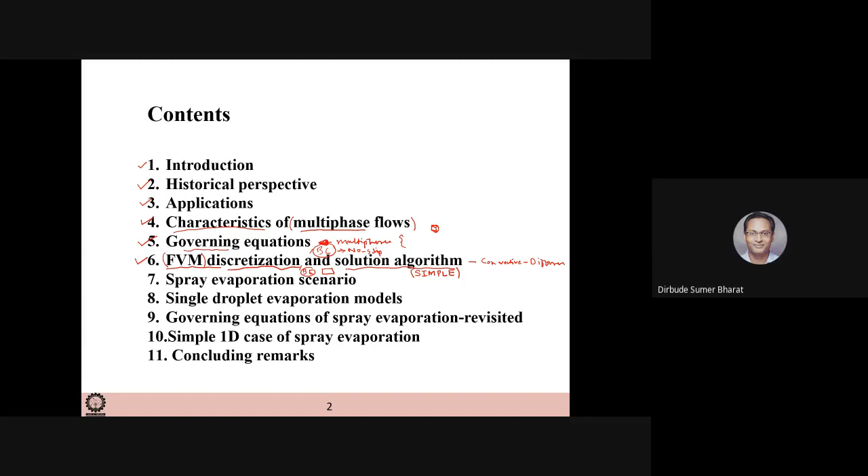It can be straightforwardly applied and the problem can be solved. Once I discuss this, I will discuss the phase change thing. I will talk about the spray evaporation scenario, how it occurs, and how spray evaporation modeling is done.

In the state of the art, the modeling is single droplet modeling. When you model single droplet evaporation, it is assumed that all other droplets follow the same behavior. These evaporation models are applied to every droplet so we can predict the evaporation rate, and once we get a mixture, it will burn the fuel and air, giving combustion in internal combustion engines or gas turbine devices.

There is an elegant theory and modeling strategy for single droplet evaporation which makes one model different from another. I will show you how different models are used for single droplet evaporation.

I will again show you the governing equations of the spray evaporation model, revisiting these governing equations and how they are modeled in terms of source terms incorporated for spray evaporation, and where the spray evaporation terms come in.

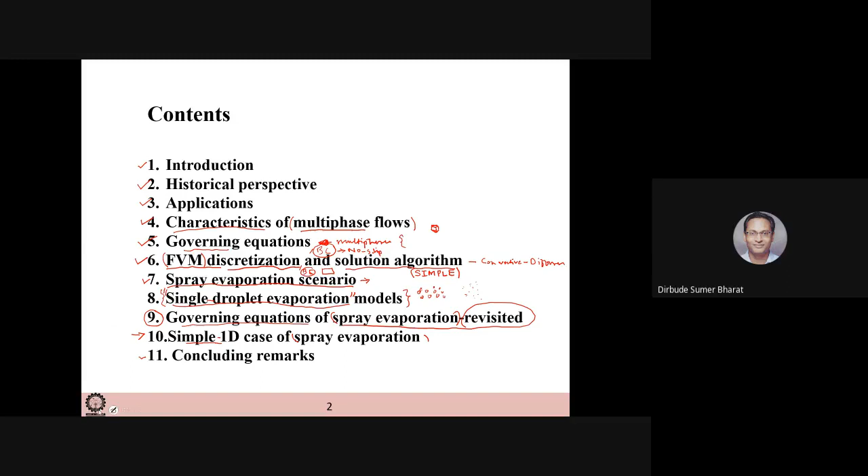First, what are multiphase flows? Multiphase flows generally have two or more distinguishable states or phases - solid, liquid, or gaseous. One can have a solid phase and another a liquid phase, or one liquid phase and another gas phase.

For example, air bubbles in water or suspended solid particles in air are examples where you can see two distinguishable states or phases - one solid, another distinguishable easily. Such scenarios can be called multiphase flows.

In other cases, there may be two distinguishable phases but with different chemical properties - distinguishable in terms of chemical properties. For example, oil in water: oil is chemically different from water, but both are liquids. Such scenarios also come under the purview of multiphase flow.

When there are two phases in the picture, like solid phase and gaseous phase, we say these are two-phase flows. If there are three phases involved, we call it three-phase flow, and similarly more than two or three is generally called multiphase flows.

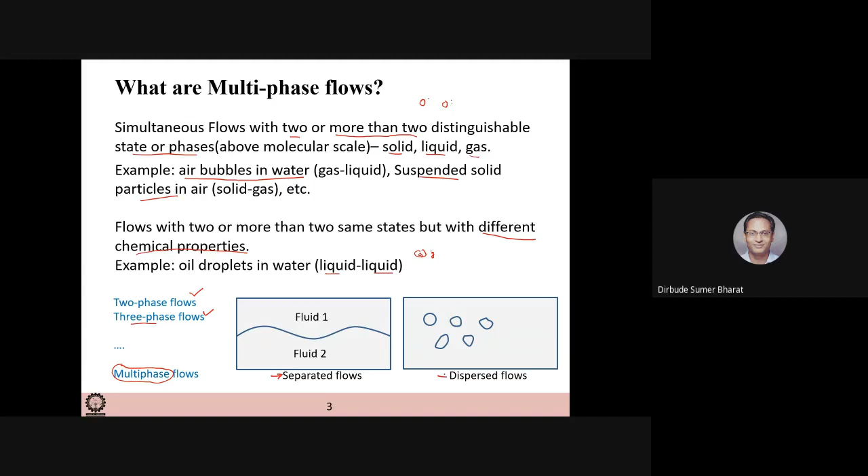These multiphase flows are mostly seen in two types of scenarios. One scenario is where the whole fluid one can be separated from the whole fluid two with a distinguishable interface.

There are two continuous phases - one continuous, another also continuous. This is called separated flow, where fluid 1 is completely separated from fluid 2 by a sharp interface. There is no mixing, no voids in fluid 2 or fluid 1. They are continuous but distinguished by the interface.

The second scenario is dispersed phase. In a dispersed phase, the second phase - this is fluid 1 and the other is fluid 2 - is dispersed, not continuous. It appears in parts here and there within the continuous domain, so you may have the second phase scattered within it. This continuous one is called the primary phase, and the second one is called the secondary phase.

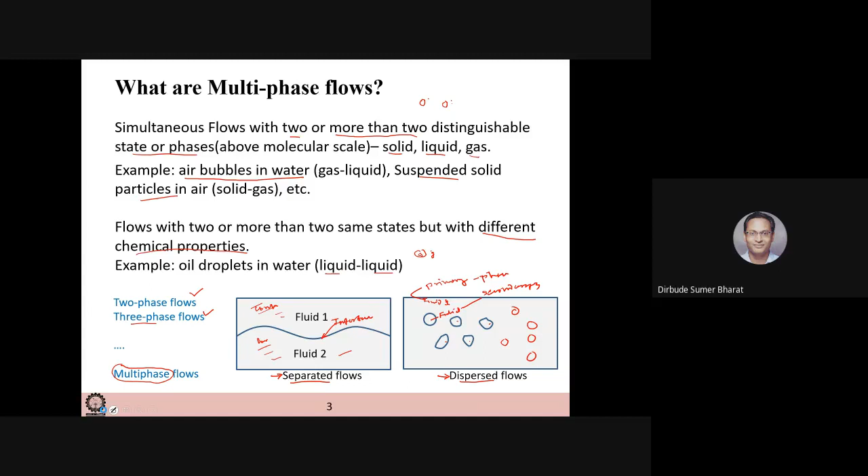So having seen two types of scenarios, I'll look at the historical perspective. In history, if you study fluid mechanics, most of the research has been done on single phase flow. The study of multi-phase flow begins with World War II.

Initially people started working with homogeneous mixture models, where the main problem is to find out the viscosity. In homogeneous mixtures, they essentially consider one equation for both phases, with certain properties included.

For example, you have this equation del phi del t plus, I'll write it in 1D, del phi del x, with certain properties like mu by rho, and del 2 phi del x2. In that case, these properties will be mixture properties.

So the problem then becomes to find out what is the viscosity. The main problem in such homogeneous mixture models is to find out the mixture viscosities or mixture properties.

For example, if you have a heat transfer equation, instead of viscosity you might have thermal conductivity. In that case, the main problem will be to find out the thermal conductivity of that model. Most other types of models were based on separated flow models.

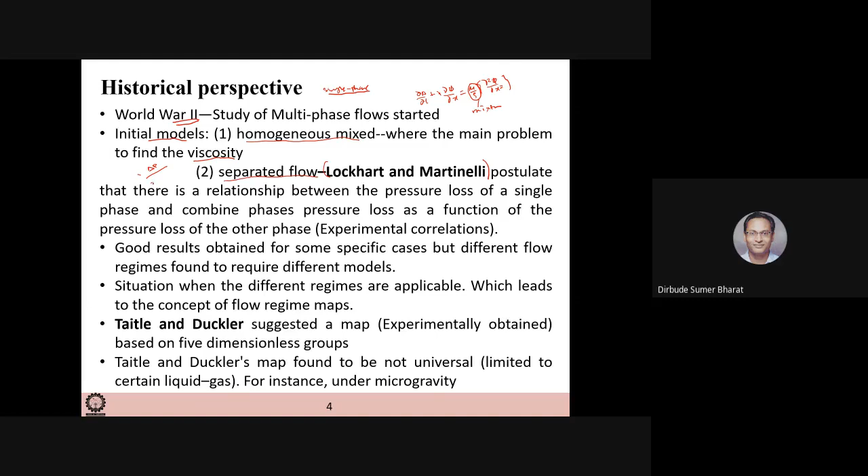In separated flow models, the initial beginning started with Lockhart Martinelli. They essentially postulated that, for example, if you know the pressure gradient in phase one, and the pressure gradient in the second phase, and somehow the relationship between the pressure gradient in phase 1 and phase 2 is known, then we can calculate the total pressure gradient.

But the problem is the total pressure loss is not a linear function - there is no linear relationship available between delta P1 and delta P2, and that is the problem. This non-linear relationship led them to derive a lot of experimental correlations.

They gave a lot of correlations for different specific cases. Based on case to case, they gave different correlations, and their correlations were found to be very good, but the requirement was that different models had to be used for different regimes, which led to the concept of flow regime maps.

So this particular practice, people started following, and they started making flow regime maps, because a certain flow regime will have a certain flow model correlation, while another flow regime will have another correlation model. People started making correlation maps like that. If you see the books on that, you will get to know there will be some patterns.

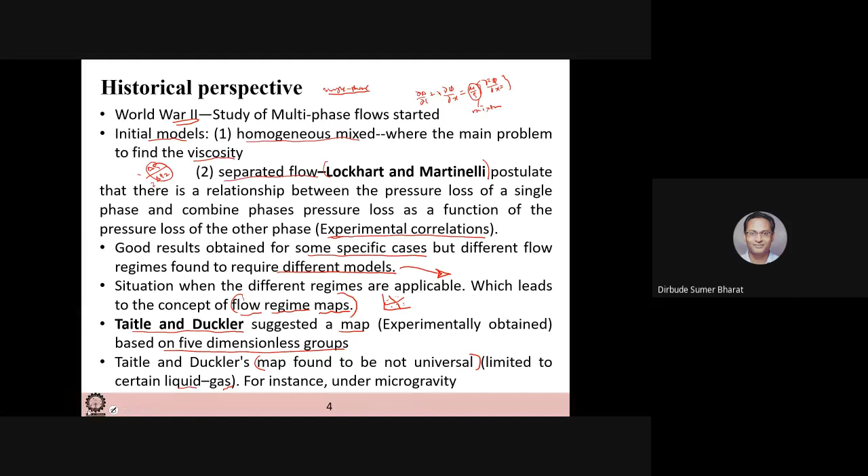So what is the way forward then? The most viable perspective for solving such problems is to go for numerical simulations. Various scenarios which we observe are, as I said, one is a separated flow kind of case, another is a dispersed phase flow case.

In this, I will not talk about separated flow models.

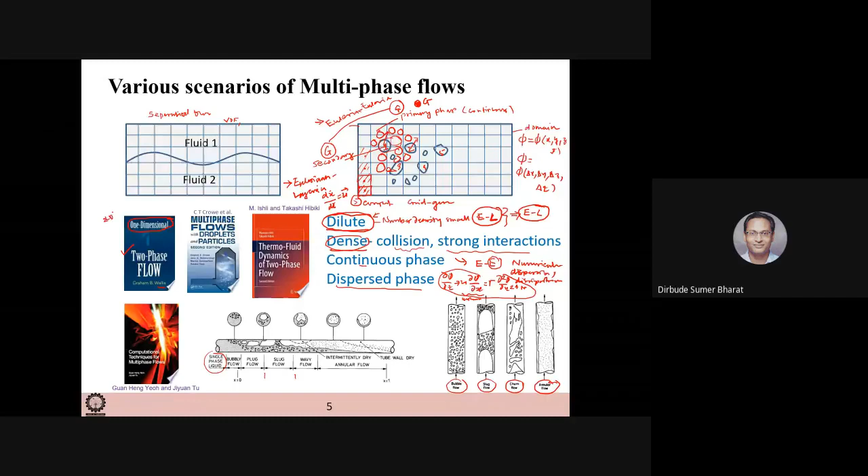There are various books to give you an essential introduction to whatever I was talking about, like Lockhart-Martinelli type models, which you can find in the very good book 'Two Phase Flows' by Wallis. It discusses one-dimensional flows, but in practical situations the flows are not one-dimensional, many times they are 2D and 3D, considered in aerospace and defense industries. So these models or the theory given there may be just restricted to 1D simulations or academic purposes. Some other textbooks, like by Crowe, give a very good introduction to modeling around the Eulerian Lagrangian model.

Two phase flow model book is a very good book by Ishii and Hibiki, which shows you how to get the governing equations for the continuous phase as well as the secondary phase, discrete phase, in the scenario of dilute phase as well as dense phase. This modeling is essentially research of the present day. It's a very tough job to model multi-phase flow, and this book shows a very good introduction. Those who want to pursue further after the lecture can go through this book. There is another good book by Yeoh and Tu, which discusses computational techniques for multi-phase flow, essentially finite volume method formulations consistent with what we follow, though it doesn't use the same terminology. Those who want to pursue can see these books for modeling of the equations as well as CFD for multi-phase flow.

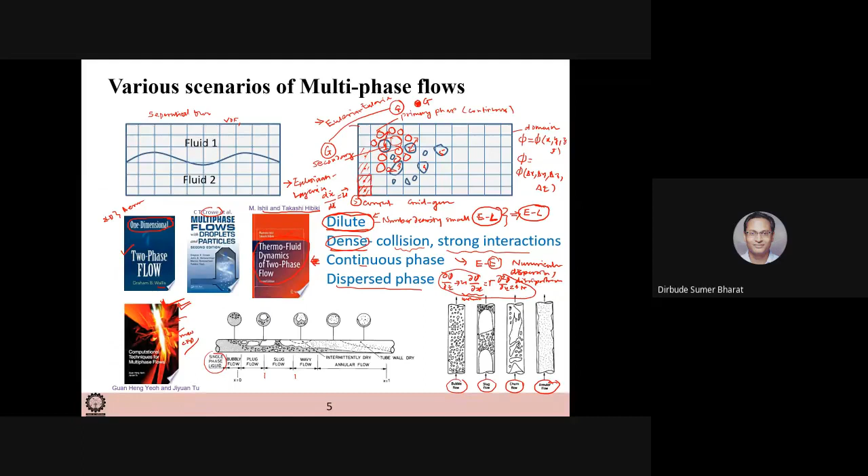I'll also discuss the applications of multi-phase flow. These multi-phase flows are found in various scenarios, not only in industries but are ubiquitous in nature. For example, rainwater falling on the ground, and sand dust in the atmosphere, can also be modeled as multi-phase flow.

There are certain applications where spray drying is used - hot spray is sprayed, drying gases come out, and the product is taken out. This drying application can also be modeled as multiphase flow. Spray coating is another example where spray evaporation, spray vaporization, and multiphase flow comes into picture, and you can model these flows using the content given in this lecture.

Substrate formation, or laminate formation, is also an application from the manufacturing side. Another manufacturing application is spray cutting, such as water spray cutting. Then you have flow systems, where you want to transfer material from one location to a second location. These multiphase flows are used to transport particles from one location to another.

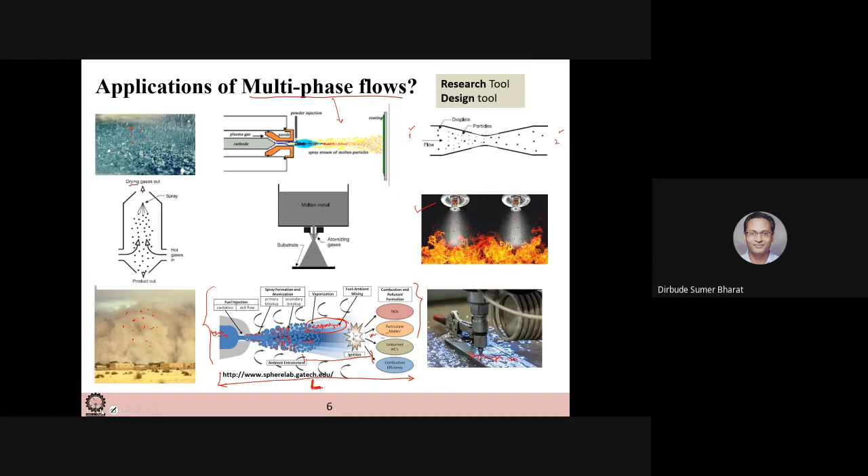Modeling of vaporization in a numerical scenario is a very important task, and that is our focus - to show how we can model vaporization in this multi-phase flow scenario for applications in aerospace industries, automobiles, or stationary power plants like gas turbine based power plants. Before going to the derivation of the multi-phase flow equations, let me talk about the characteristics of these multi-phase flows, how they differ from single phase flow.

So what difference do you see in multi-phase flow? In cases we had this domain and we had a droplet, for example. We see that these droplets may at another time change their shape. What is this particular region I have shown? This is a droplet, but essentially for this phase and this phase, this particular region is an interface. This interface keeps on changing.

So there is an existence of the interface. First thing is existence - it exists in all cases, in all multiphase flows. The interface is existing, and not only that, this interface is dynamically changing - meaning changing with time. It keeps on changing. Its shape may be there, and at another time it may be different. So how do you model such a thing? It's very complicated - such a characteristic it has.

What other thing is there: it has significant discontinuities in flow properties. For example, suppose this is air - the density of the air is very different from the density of this phase, say water. We know that density is very large in case of water compared to air. So these large discontinuities happen. You see there is a large value here, then again a large value, but in between there is a small value. This kind of discontinuity in fluid properties you can see in all multiphase flows.

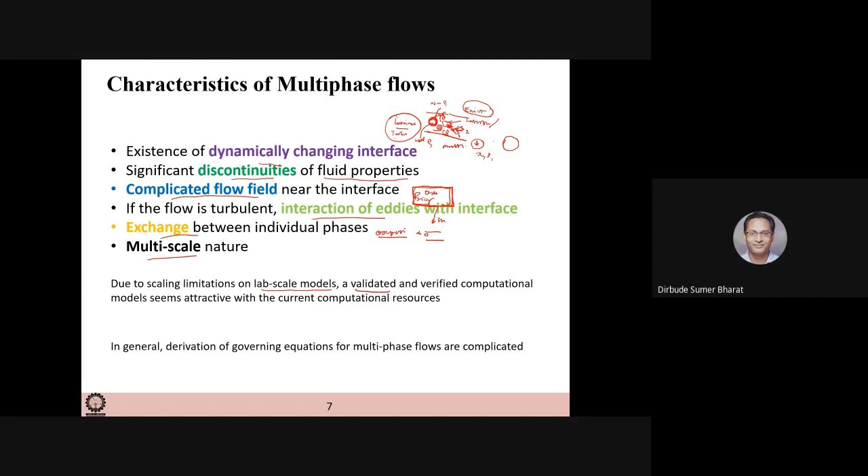So it is not scaling down. Scaling down of the big actual devices into lab scale models is a problem. So in future, for the real time problems which occur in aerospace industries and defense sectors, the best scenario is to have good validated and verified CFD models.

Validated and verified, that is very important, because CFD is an approximation method to solve the PDEs. So we need a validated and verified model.

Now for this current scenario, because of these limitations of lab scale models, it seems attractive to go for computational fluid dynamics software. Present day scenario is such that we have very good high speed computers which can handle these multi-scale natures, turbulent flow natures, complicated flows and discontinuities, and fulfill the complicated characteristics of multiphase flow.

So we see the importance of CFD in that. But to do CFD, we need governing equations, like Navier-Stokes equation type of equations for multiphase flow.

What I'm trying to show here, in general, is that the derivation of the governing equations for multiphase flows is complicated. I will just show you in short how they are done.

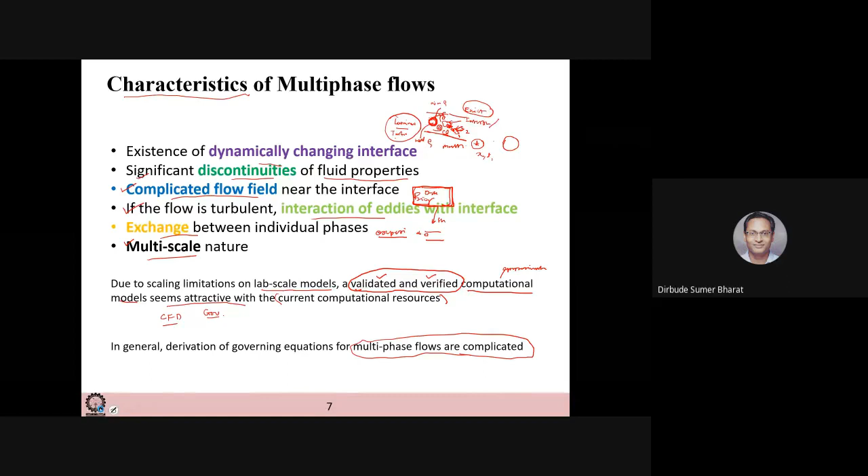But what about this? So this is also assumed that this will be modeled as a continuum.

Now this needs to be modeled as a continuous phase because it is discrete in nature. If it's discrete in nature, how will we solve it? So we start by assuming that they are also a continuum, and they are intermingling with each other and interacting as a continuous phase.

So it is assumed that this dispersed phase is a continuum, and they intermingle with each other and behave as if they are continuous phases, not discrete phases. With that assumption, we can derive the Eulerian kind of two-phase flow equations, one for the first phase and another governing equation PDE for the continuum phase, and that is what we wanted to show here.

Now, when you make this continuum assumption and you see the discrete nature and want to put it in a continuum framework, what we do is discuss averaging properties rather than individual properties. So to characterize the discrete phase properties, an averaging procedure is done.

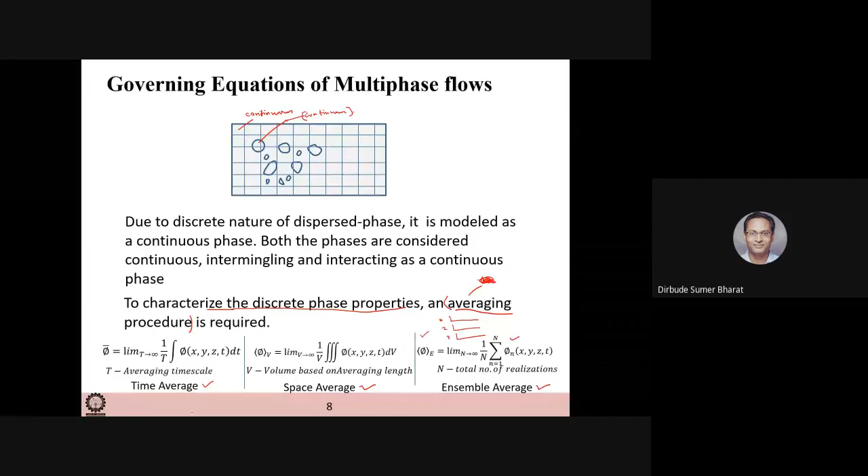So you can have essentially three varieties of averaging. If you do averaging of this discrete nature of the particles to bring them into continuum assumptions, their averaging properties are not local properties, they are global properties. But if you want local properties, this local nature of the droplets is lost.

Now to bring in that local nature which is lost, you need semi-empirical closure relationships. If you put in these closure relationships, which are semi-empirical in nature and experimentally found, then these semi-empirical correlations close the loss of information due to averaging and fulfill our objective.

Okay, so that is the procedure. Now these derivations. In case of single phase flow, we take some infinitesimally small volume, and we also take another case like a control volume. So there are 2 scenarios in which we take in single phase flow.

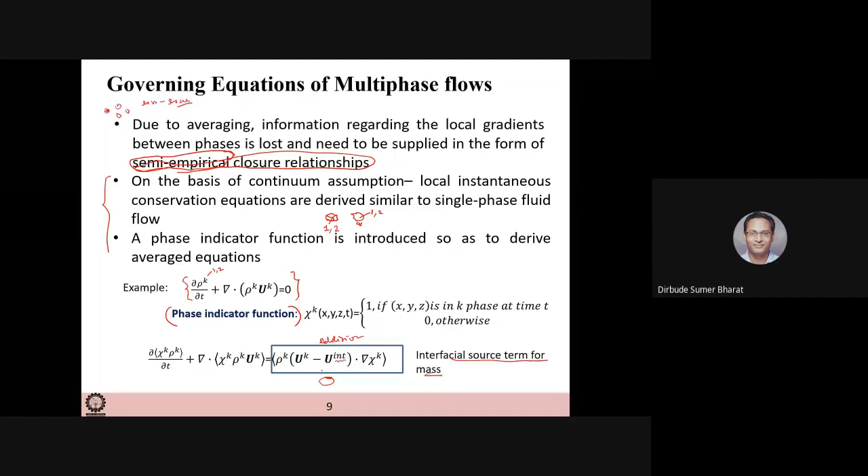Similarly, you can derive the momentum equation, and you get these terms as a source term for momentum. Similarly, you can have an energy equation and you will get source terms for the energy. Now, once you get these equations in terms of averages, there are certain things where you see the averages of the product.

Suppose this is one quantity, this is another quantity, and there is an average of these two quantities. Calculation of these averages of the product is very difficult compared to calculating the product of the averages. If this is the first quantity and this is the second quantity, then this is very easy compared to calculating such quantities.

So we need some procedure here to separate the mean flow from the fluctuating quantities. This is similar to what we do in turbulent flow, where we take the average, this is mean, plus any quantity. We used to take any quantity as psi, that is the mean, plus the fluctuating quantity. So like that.

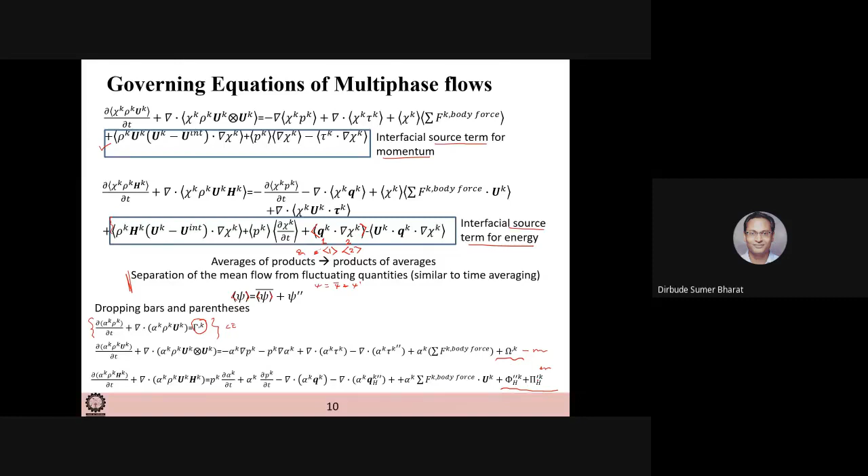So this is a source term, this is another source term, and here is another source term for mass, momentum, and energy, which is happening at the interfaces, because of interfacial exchanges and the complicated processes happening over the interfaces due to the nature or characteristics of the interface. So if we know these terms, we need some equation to solve for this. If you use a linear relationship, this type of linear relationship, then your equations become much easier.

So this is kth phase to lth phase, l to k phase—this interaction is there. These equations become very easy, and then you can solve this with known linear source terms for mass, linear source term for momentum, linear source term for energy, and you can solve these equations.

Now these equations, what are the equations I have shown you? These equations are for both the phases, phase 1 and phase 2. Now there can be another model where instead of having two different phases, we say they are the same phase—a mixture. Instead of solving two separate equations, one for each phase, we get one set of mass, momentum and energy equations, whereas in the previous models we used to get for the first phase mass, momentum and energy equation, and similarly continuity of mass, momentum equation, and energy equation for the second phase.

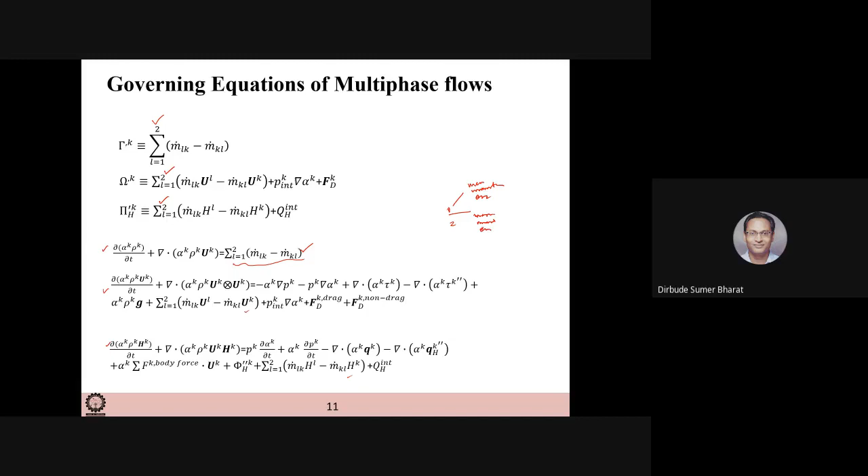Now there is another scenario called a mixture model, where we do not consider two separate sets of equations for two or more phases, but instead say both phases form a mixture, and we solve the equations for the mixture. M denotes mixture. So this is a mixture continuity equation, this is a mixture momentum equation, this is an equation for energy of the mixture, and here the mixture velocity, the mixture density, mixture viscosity, mixture thermal conductivity, mixture velocity, mixture energy.

These are defined as a sum of products of alpha k, rho k. In case of rho, in case of mu, it is alpha k rho k—you sum the product over all phases. So alpha 1 mu 1 plus alpha 2 mu 2, and based on that you get the mixture viscosity. Similarly thermal conductivity, similarly mixture velocity. So you can solve this for the mixture and get the properties, and you can also get the individual phase velocities. Suppose you get the mixture velocity from this, then you can calculate the individual phase velocities. So this is another model.

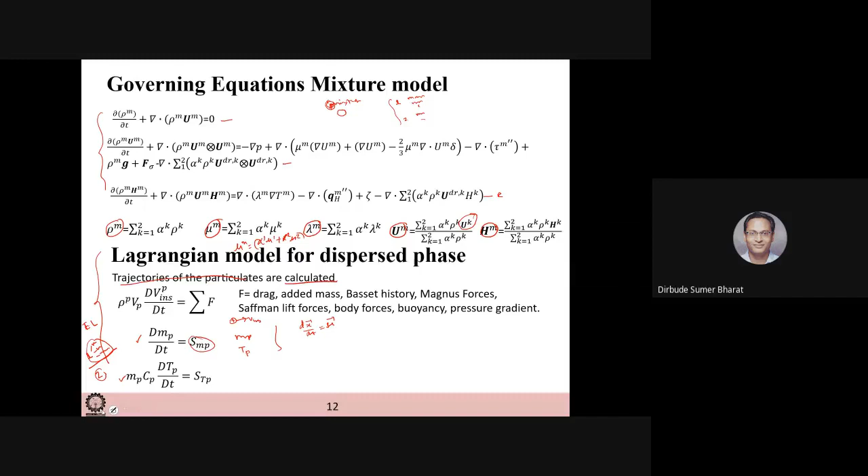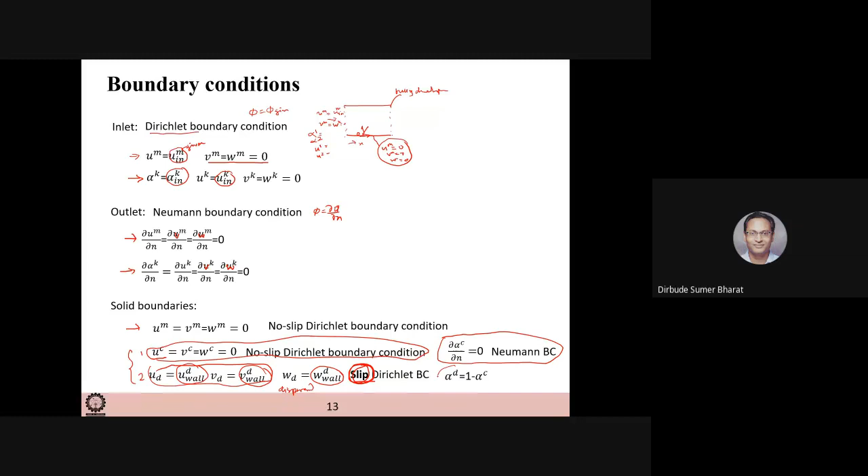There is always a slip condition. Otherwise, if you give a no slip condition, the droplets will not be moving, will not be interacting, will not be bouncing back, so that slip condition is mandatory. And what about alpha? Alpha D, once you know alpha C, alpha D is already known. So 1 minus alpha C is a boundary condition at the wall. These are the boundary conditions generally used.

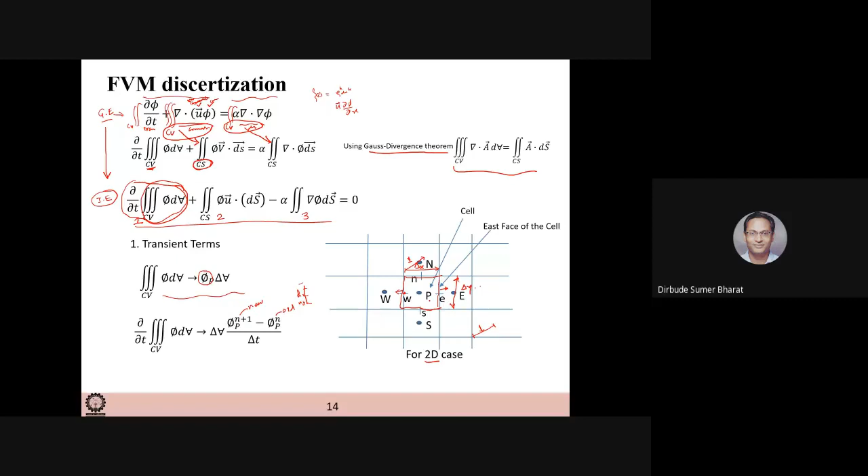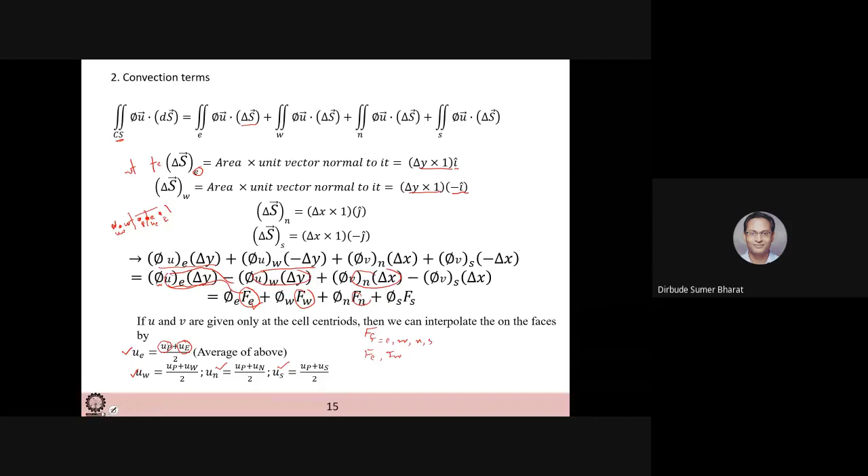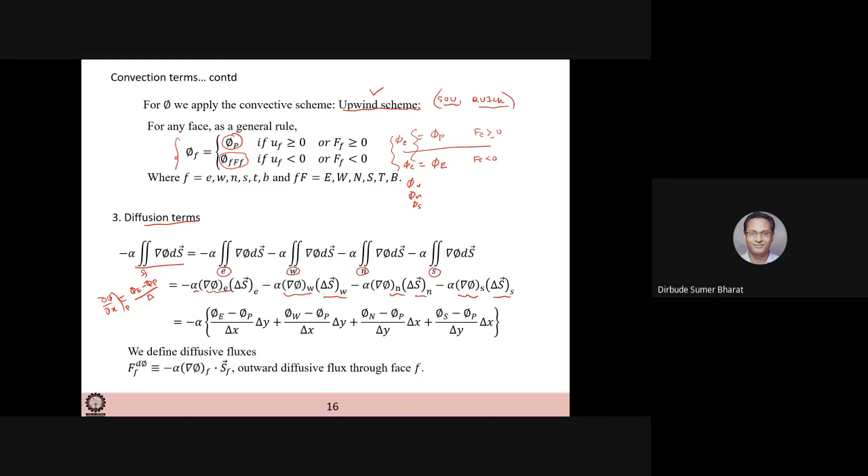Now in order to get the gradient of phi, suppose gradient of phi del x, it is obtained as del phi del x at P. This is calculated as the phi east forward, central difference, phi e minus phi p, divided by whatever delta x is present. So central difference is used to get the value of the gradient at P. Here we have the east cell center, and here the west cell center, to get the gradient at this P-th center, which is our focus current location.

So at this current location, what is the gradient? To get that gradient, we use central difference. So whatever distance delta x is there in the x direction, the distance between that divided by this gives you the value of the gradient of phi.

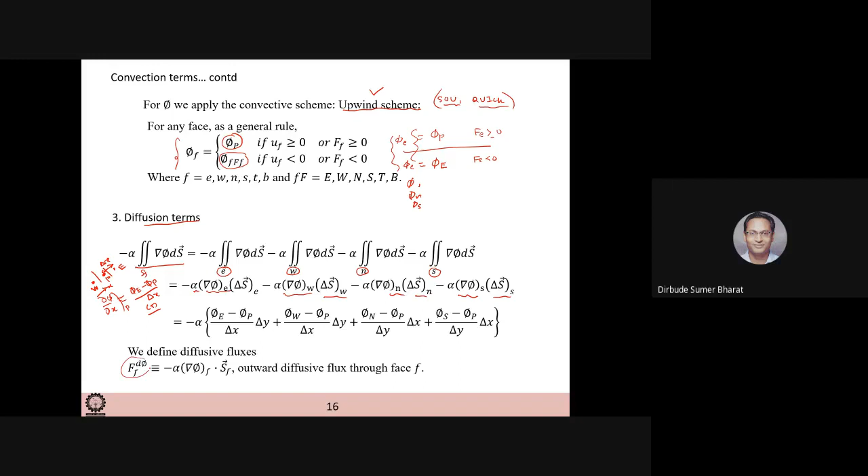So in general, we can write FFD phi as alpha grad phi f and SF dot SF vector. We can define it like this, just to note it.

Now based on the nature of the problem, it can be explicit or implicit. If m, all m, are n plus 1, then it is implicit. This means there are more than one unknowns. If there is more than one unknown, it is called implicit. In explicit cases, we have only one unknown and all others known.

So if you replace m by n, n means old values, known values, that is old values, and this is unknown, meaning new values. So to get the new values, we will have all known values. In that case, we say it is an explicit scheme.

Otherwise, if you have more than one unknown, if m is replaced by n plus 1, then this becomes implicit. What does it mean by explicit and implicit? When explicit, you can directly calculate the value of phi P, but when implicit, it means we have to solve these equations, and these may be many equations.

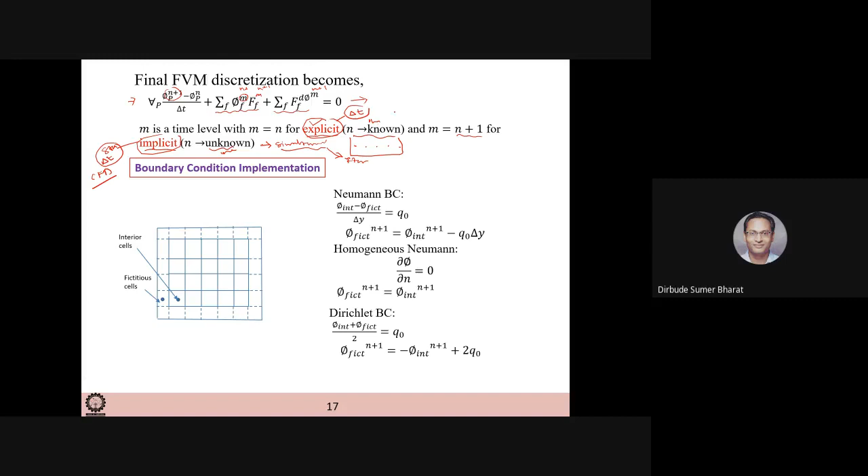Now with this, how do we get discretization irrespective of staggered grid and collocated grid? If you apply staggered grid and collocated grid schemes, you will get little modifications. And how do you apply boundary conditions?

For example, this is a domain, this inner region is a domain. So this is your computational domain, and now boundary conditions are given. Suppose at this left boundary, a condition is given. This boundary condition can be of Neumann type, Dirichlet type, Robin, or mixed type. Now I'm only discussing Neumann and Dirichlet boundary conditions.

Suppose a Neumann boundary condition is there, meaning del phi del y equals q naught. This is the condition given here. Then we say this is the interior point, int, and this is a fictitious point. So to apply the boundary condition, we have to consider a layer of fictitious cells around the boundary. These are all fictitious cells. That is one important thing you have to remember: whenever you want to apply a boundary condition, you have to consider a layer of fictitious cells.

And once you use fictitious cells, whatever value is there, you call it fictitious. So phi interior, what do we do? You take phi interior minus phi fictitious over delta y equals q naught. This gives us the value of phi fictitious like this. Suppose the homogeneous condition is there, you simply set it equal to 0, so phi fictitious equals phi interior because q naught is 0.

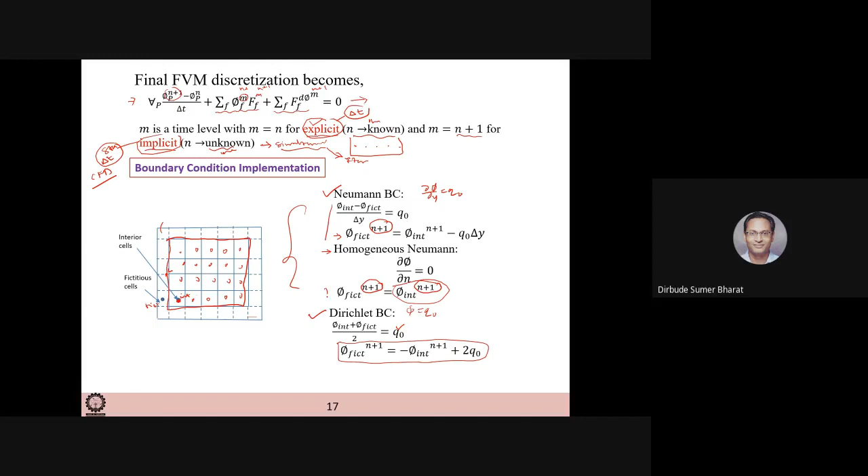So if you do this, you can get it, but we were discussing the convective diffusion equation. Now if you take the momentum, the Navier-Stokes equation, then you get pressure terms like del p del x, 1 by rho del p del x. Now how do we handle these terms? We again take a triple integral, a volume integral of that term.

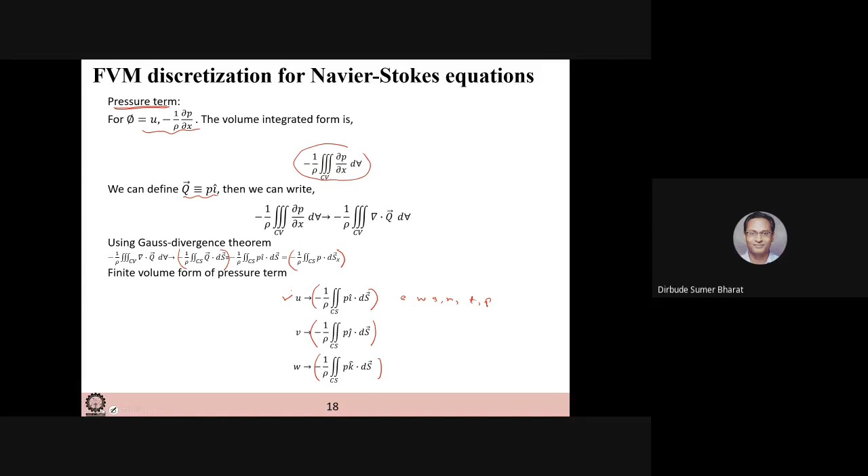Now we can integrate these equations in the similar manner we did for east face, west face, south face, north face, top and bottom if it's 3D. So you can do these integrations for those cases and get proper values. Once you get this, your Navier-Stokes equations' discretized forms will also look like this. With this discretization, m can be replaced by n plus 1 or n, which will decide whether it's implicit or explicit.

But pressure, when solving Navier-Stokes equations, is always unknown for incompressible flow, because in the continuity equation there is no pressure term, no density term, so there is no way to calculate pressure directly. This leads to what is called the pressure correction equation, a Poisson equation for pressure correction, or a pressure equation for collocated grid, and pressure correction equation for staggered grid, and you have to solve these three equations. Once you solve these three equations, you get the solution.

Sorry to interrupt, sir, but we are running out of time.

That pressure velocity decoupling, you can remove that decoupling by staggered grid. In case of collocated grid, that pressure velocity decoupling is handled through something called momentum interpolation, and it doesn't show any problem with that.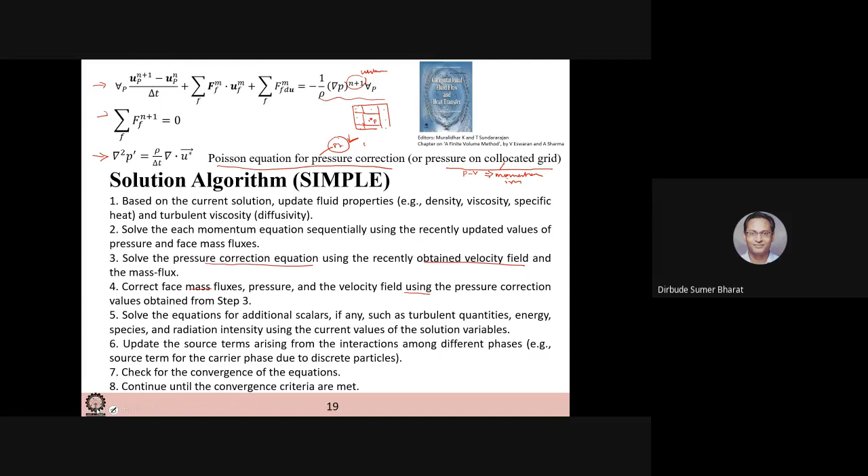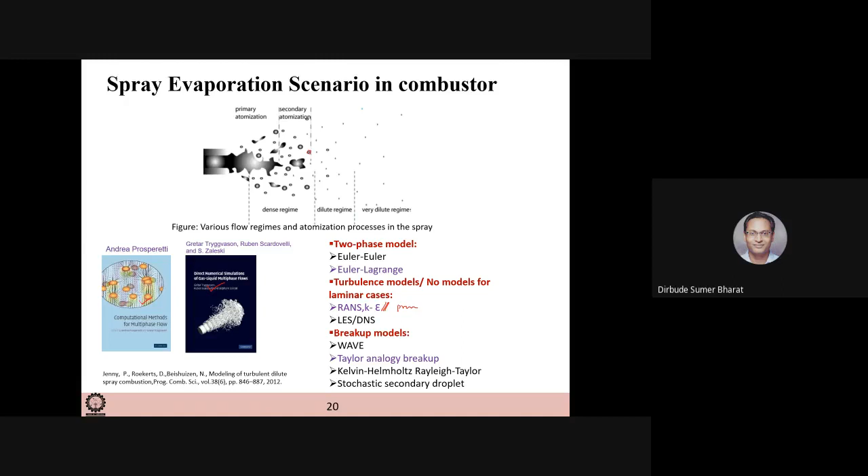So what happens is, the droplet is there, and when it evaporates, it's like etching - it is taking the material from it. So that is modeled in the kinetic model. The hydrodynamic model does not consider that thing.

Hydrodynamic models - suppose we have this droplet phase, then there is a liquid phase, and there will be a gaseous phase. So there are certain models for this, and certain models for that. So you have two separate models for that kind of scenario.

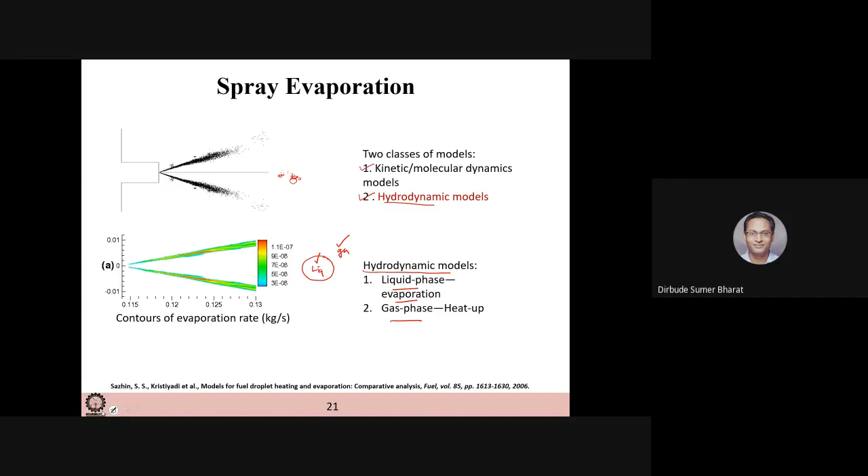So for single droplet liquid phase, you have constant droplet temperature models, infinite liquid conductivity models, and spherical symmetry models. So what does it mean? It means inside a droplet you can assume that the temperature is constant over space and time.

And there can be other models like vortex. So stream function vorticity models can be used to model that, or you can use Navier-Stokes equations. These two models are very complicated and time consuming, so still the 2 to 4 models are mostly used in CFD.

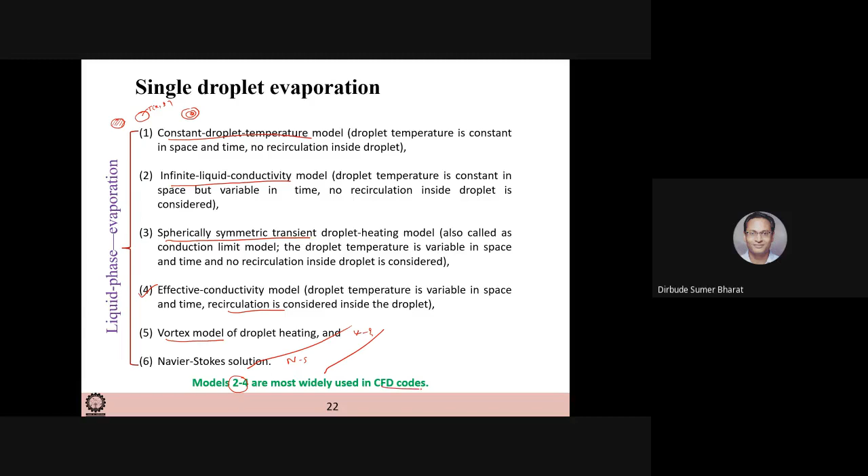In case of gas phase models, we mostly use the classical model, which says that in the droplet and near the droplet there is saturation of the vapor. Saturation of the vapor means that whatever the diffusion, fuel diffusion rate is there, that is nothing but the evaporation rate of the fuel.

So there are other models like Abramzon-Sirignano, Yao-Abdel-Khalik, and the non-equilibrium model, which correct the situation. In the case of Abramzon-Sirignano, they consider that over the droplet and very near it, there is a boundary layer effect, so those boundary layer effects are considered.

Non-equilibrium cases do not consider equilibrium near the phase, whereas in the classical model, equilibrium is considered. Non-classical models consider non-equilibrium, and they use kinetic models like the Langmuir kind of models.

And in classical models, we can calculate the species mass fraction using the Clapeyron equation, or Clausius-Clapeyron type equations. That is not possible with the non-equilibrium model.

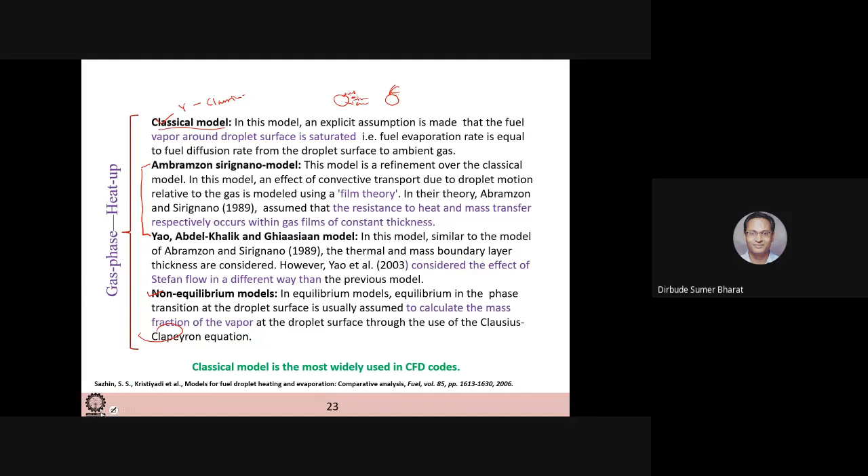And once you do the modeling, there are relationships in terms of dm/dt, dT/dt, and in most of these cases, correlations are obtained - Nusselt number as a function of Reynolds number and Prandtl number, Sherwood number as a function of Reynolds number and Schmidt number - to incorporate the convection.

Suppose you have a droplet, then you have convection here, or conduction, and these effects are there. These are modeled through these empirical correlations.

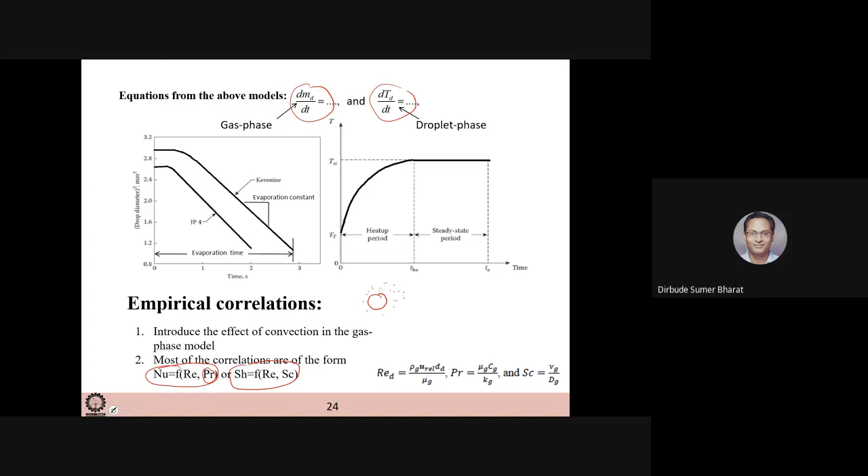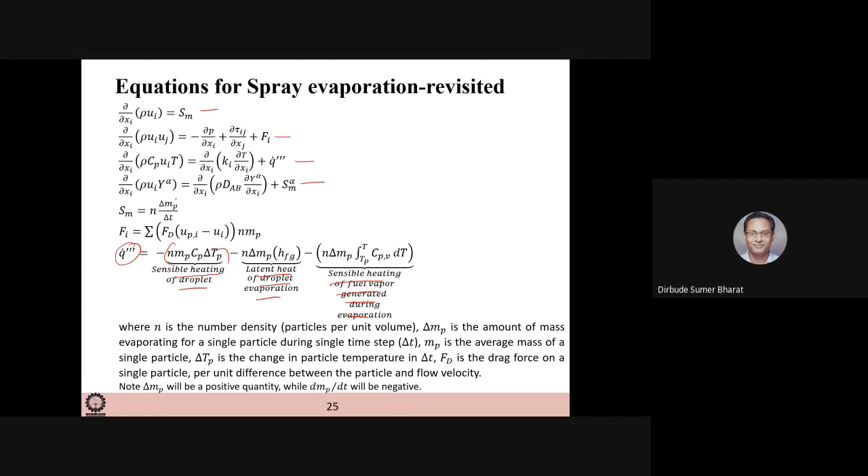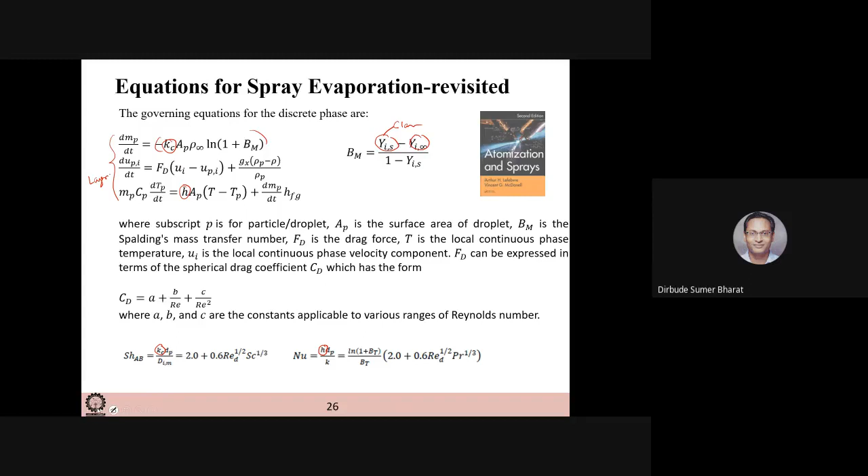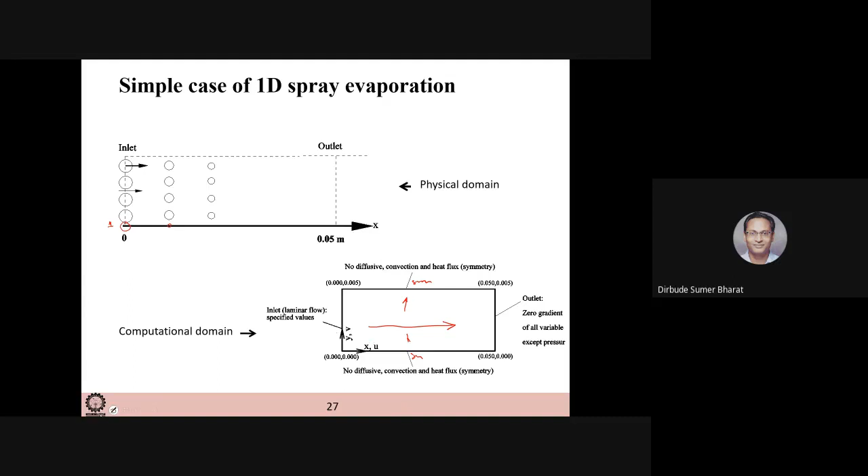Once you solve this problem on any domain, so this is a 1D domain we have considered. In a 1D case, there is a drop coming, and this drop is evaporating in the x direction. In order to model the 1D case in a 2D framework, we have used a symmetry boundary condition, meaning nothing is happening in that direction, only happening in one direction.

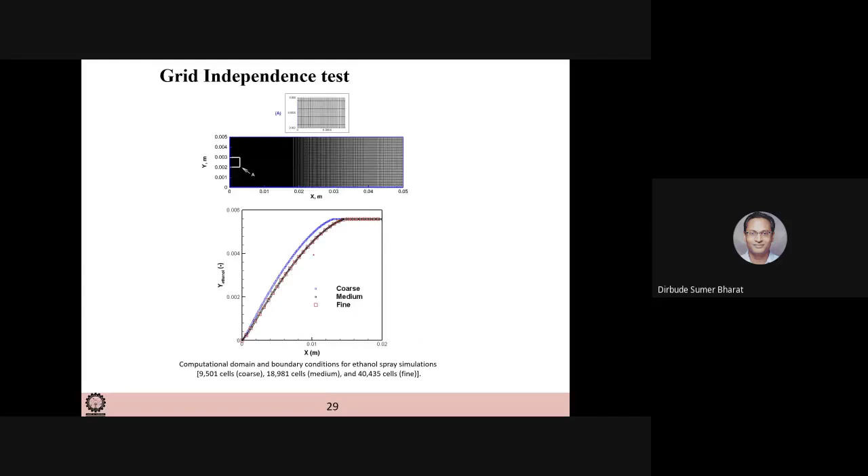Using this and the boundary conditions mentioned here, we got the grid independence first, and the result shows the mass fraction of ethanol with the analytical solutions. The fluent result is the red one, and there are certain models we have developed in our case, which are C1, C2, and so on. I have not discussed these models in detail, but they are compared, and the C5 model is found to be close to the analytical results.

Again, the droplet diameter is reducing with time, so prediction of droplet diameter with time is plotted, compared with the fluent solution and the analytical solution. Our C5 model again gives very good results.

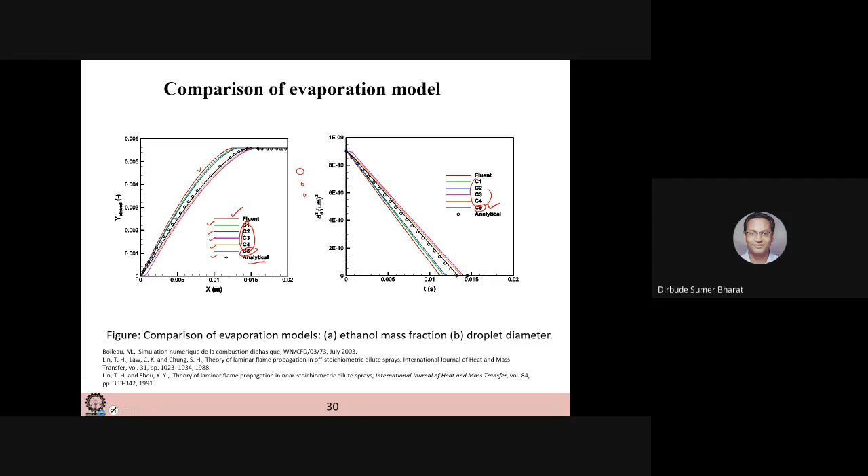So what I'm saying is that multiphase flow is very complex. Empirical correlations and pressure loss are not universal, so CFD is necessary, and you have to use a continuum framework. These equations are still under research to find closure models, and you can always work on finding a closure model for evaporation, for example.

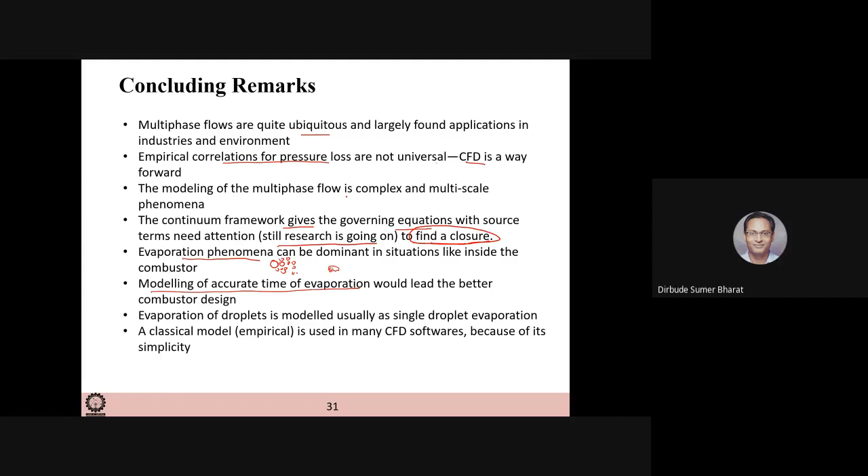The one model which I have discussed for the evaporation model is the single droplet model. Even though in many real cases there are many droplets in a spray, what is done is single droplet modeling, and then it is applied to many droplets. That is what the state of the art is. That is what I mean to say here.

Most of the CFD software still uses classical models, and you can always propose other models or improve classical models, and carry forward your research in that direction in order to predict the evaporation rate accurately. Thank you for your time.

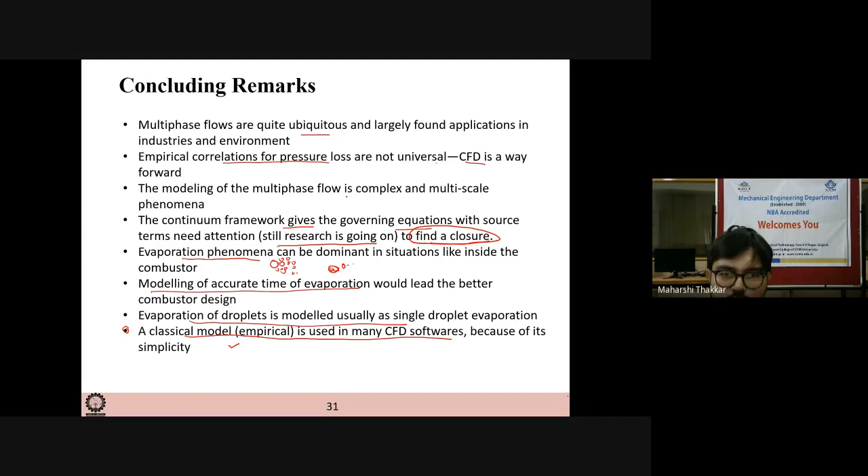I just want to ask you, sir, one thing. You explained the simple algorithm. Is there any other CFD technique which is popularly used for this multi-phase flow, like pressure correction method and other terms?

If you are asking me about this CFD method, then there are many other CFD methods, like lattice Boltzmann method, that is also popular. Now you are asking about this pressure velocity effect.

This pressure velocity coupling is, as I said, about the staggered grid and collocated grid. Staggered grids are mostly favored because in staggered grids it is found that the velocities and pressures are not decoupled, so you get a good coupling and do not get any problem in getting solutions. But at the same time collocated grids were there, and if people used the same strategy in collocated grids, they found that there is a problem in terms of pressure velocity decoupling.

To fix that, they use what I mentioned, called momentum interpolation. If you do that momentum interpolation, you do not get the pressure velocity decoupling. Right now, in the present day scenario, even Fluent and all CFD codes everywhere use this collocated grid arrangement.